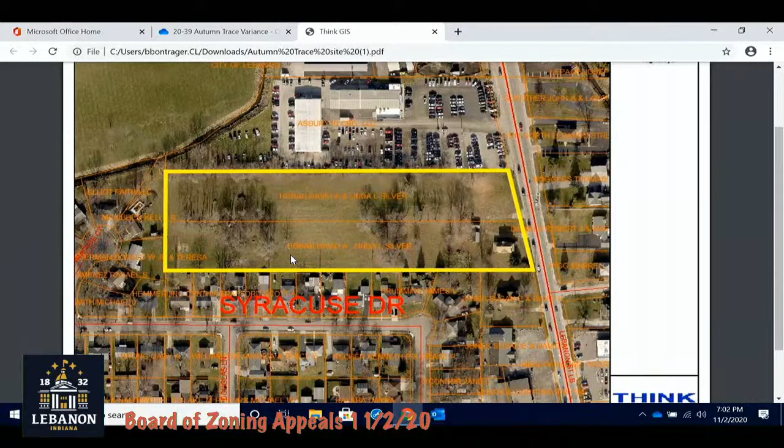I'll walk through a little bit of the project overview for you and then the two specific requests that are for you here tonight. Just generally speaking, if they'll pull the screen up here, we'll look at the overall site. Outlined in yellow is the site. As you can see, it's kind of a very deep but relatively narrow site, which is the reason for a couple of the variance requests tonight. You see there are residential homes that border this property to the south and to the west, and then you've got the car dealership to the north.

For reference, if you're familiar, this is the site where the car wash was proposed out here on Lebanon Street, so it's just north of that, between that and the car dealership on North Lebanon Street. So that's the overall site. As is mentioned, this is zoned planned business commercial. Senior living, which is being proposed here, is a permitted use within the planned business commercial zoning district. So the use is permitted.

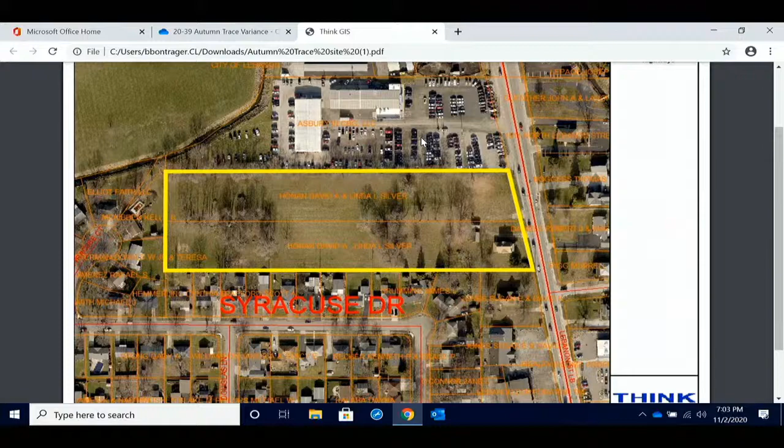Looking at the overall development site with the applicant, before I get into detail there, I'll pull up the overall site. Actually, let me zoom out a little bit so you can see it a little bit better. This gives you an idea a little bit of the overall site. Lebanon Street again is on the right here. They're providing a single entry point, parking in the front and the back of the building. It is a U-shaped building that kind of sits like this.

You've got access around both sides of the building. These are actually one-way access. The fire department requires 360-degree access, particularly on a two-story building like this, so they were required to put drive aisles on both sides of the building. So this kind of gives you a general idea of the layout of the property here.

The two variance requests are related to, again, I mentioned they're very deep but relatively narrow properties. So what you have here is you have the building, the required building-based landscaping, the required sidewalks, the required drive aisles. What you're left with on the north and south sides of the property is a somewhat limited area. On the south, you have utilities that run through there, as well as drainage swales, providing drainage to the back of the site where there's a dry detention pond. Same on the north side, you also have an open swale up here that's conveying stormwater to the back of the property. So you have a very limited area to do anything.

And there's two things that created a variance request because of this. The first is parking lot perimeter landscaping. As you can see, they've provided all the required buffer and parking lot perimeter landscaping out on the front of the building adjacent to Lebanon Street, as well as across the back of the property. And I will point out here, they are doing some revisions to the site plan on the west side of this property to the rear, because the properties are so deep, they are directly adjacent to residential zoning, which requires a buffer yard.

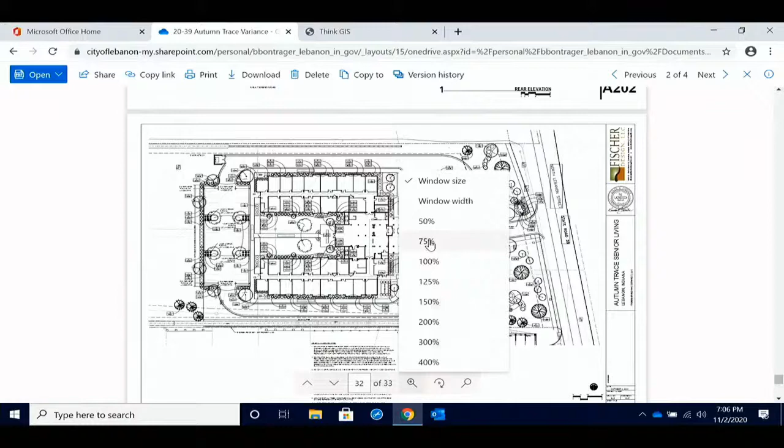they are providing along that south property line an 8-foot privacy fence that'll be set a foot off the property line that will run the entire length of the improved area. So essentially from the back of the parking lot here, it extends all the way up to the front of the improved area in this area.

So because they don't have the space, they worked with staff and decided it made more sense just to provide the privacy fence here, 8 feet tall, to provide as much screening as possible where they weren't able to provide the full depth, the 30 feet. So at least there's the visual screen.

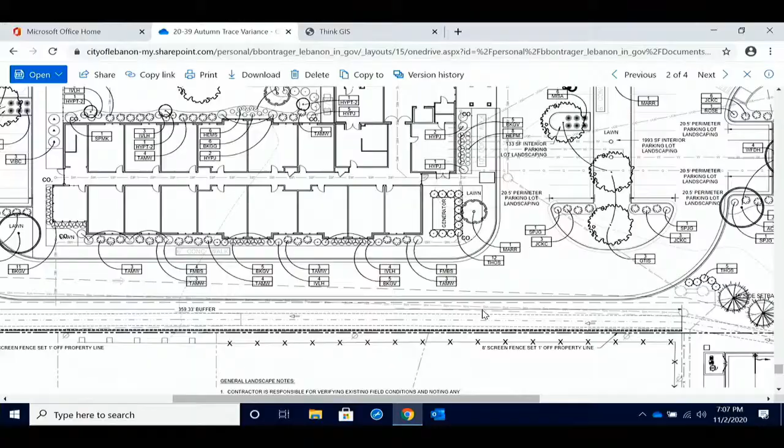Just walking through a little bit from the staff report on the first variance for parking lot perimeter landscaping, I'll just reference the findings of fact in the staff report, that the relief from the perimeter landscaping requirement poses no imminent threat to the public's health, safety, morals, or general welfare of the community. And the request for relief from the perimeter landscape will not affect the use and value of the area adjacent property in an adverse manner.

And then the third one is the strict application of the UDO will result in practical difficulties. We have determined that there are practical difficulties because the need to provide 360-degree access, and underground utilities and drainage, are limiting the space for the landscaping, thus supporting the idea of the variance. So with that, planning staff has recommended approval of the development standards variance request to permit relief from the perimeter landscaping requirement. And then number 2, the landscape buffer here on the south side.

The relief from the buffer requirement poses no imminent threat to the public health, safety, morals, or general welfare of the community. And the use and value of the area adjacent would not be affected in an adverse manner. They are providing the 8-foot tall privacy fence to provide the visual screen that's required of the buffer. And third, the strict application of the terms of the UDO will result in practical difficulties. Again, for the same reasons as the last one, the need to provide 360-degree access and the underground utilities and exposed drainage swales certainly provide limited area for this to occur.

So with that, on the second variance for the buffer, planning staff does recommend approval of this development standards variance request to permit relief from the landscape buffer requirement. I'd be happy to answer any questions if there are any.

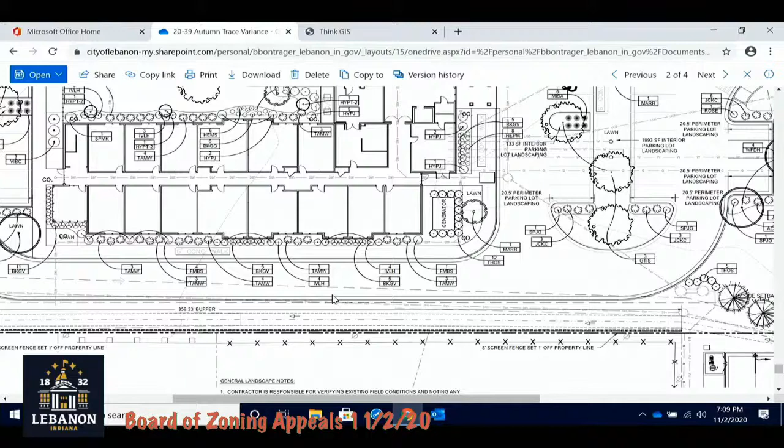Ben, I have a question. How far is the building from the property line on the south side? Let me see, I might have to go back to the site plan to see if I can provide dimensions. I can tell you that the drive aisle is 20 feet here. So we're somewhere around 40 feet, I would guess. Gary, do you have that? Yeah, let me see if I can locate.

While we're looking, any elevation change from the building to the property line? It's pretty flat. I don't know that there's much. It is a 2-story building, so it is still visible. An 8-foot fence isn't going to totally screen a 2-story building. But yeah, the site is relatively flat, so if there's a change in elevation, it'd be minimal. Looks probably roughly 40 feet. Yeah, I would guess it's in the neighborhood of 40, 45 feet. Just looking at the scale here, that's 20 feet. That's about 15, probably another between 5 and 10, so.

Okay, any other questions? What will the material be for the fence? It's like a tan vinyl fence. Are there any setback requirements from the property line to the driveway? I'm sorry, say that again? Any spacing requirements from the property line to the driveway? To the driveway. This southern driveway? Yeah. So because there's a buffer requirement, it would have to be 30 feet. But normally a drive without the buffer requirement only has to have a 5-foot setback. Okay.

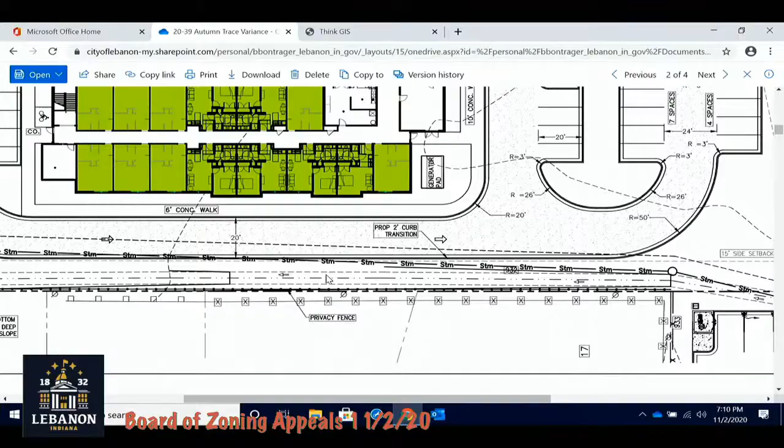Anything else for Ben? Thank you, sir. Would the applicant care to step forward?

Yes. So I'm Jason Yoder, TriMac Building Services. I'm actually the general contractor of the project. And Jim Gillen is the owner of Autumn Trace, so I figured I'd bring him with me. Okay, you might just give us a brief summary of what you're doing and so forth.

So the project itself is a two-story assisted living building, 50 or 54? 54 units. As far as the construction part, an elevator, nice finishes on the inside, granite countertops in every unit. Living spaces or private dining rooms, theaters, things like that inside the building.

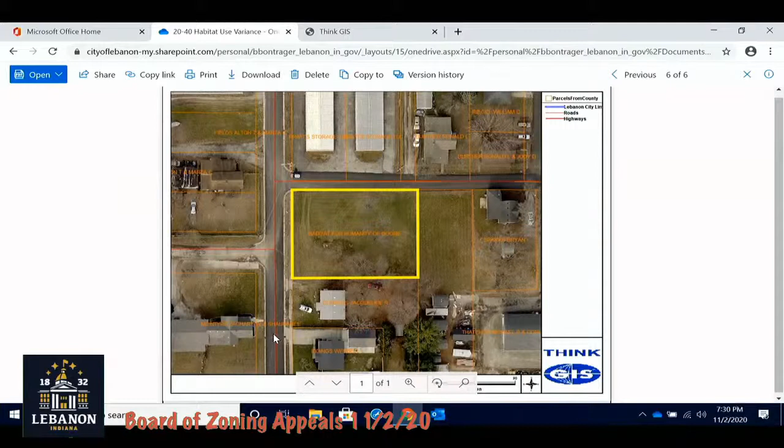Ben? All right, this is going to seem like a very familiar request for Habitat for Humanity, because it seems like every property that's gifted to them or they purchase is zoned incorrectly for residential uses, even though it's in a residential area. And that's essentially what we've got here. This is actually a property that they purchased from the city through a bid process. It is southwest of downtown along Coombs Street.

This is kind of a mixed-use area. There's some older industrial in this area, but then also a lot of residential. As you can see here in the aerial, you've got storage units to the north. You've got residential units primarily around it. This is primarily a residential area, but as you go further west, it does get into more commercial or industrial uses. But as you can see here, this site is not sized appropriately for general industrial uses.

It doesn't meet any of the lot size requirements. You couldn't meet any of the setbacks. It's a residential lot. It just happens to be zoned industrial. So again, like I said, this is probably the fifth request they've had in the last 3 years for something like this. It's always zoned multifamily or commercial or something like that. So the request is here to allow single-family residential uses within the general industrial zoning district. It's a use variance request.

The 5 findings of fact for use variance are indicated in the staff report. Again, as I mentioned, in terms of criteria, the need for the variance arises from some condition peculiar to the property. It's zoned for industrial uses, but it's not sized appropriately. It's sized for residential uses. That's what's in the general vicinity. The strict application of the terms of the zoning ordinance will constitute an unnecessary hardship. Again, this property wouldn't be buildable if it was required to meet the general industrial zoning classification and development standards.

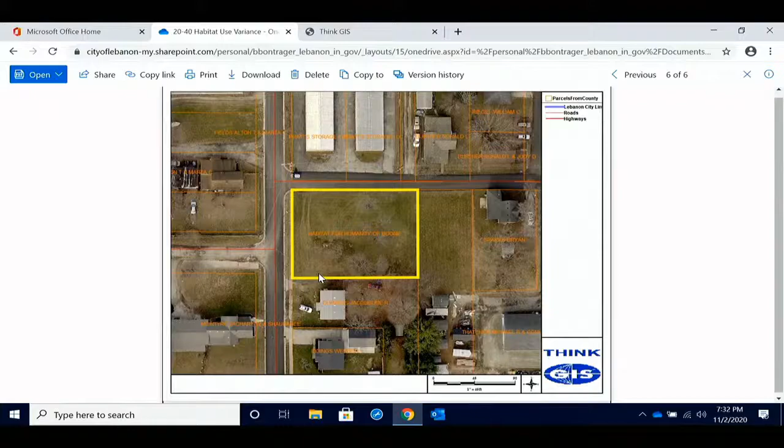And the approval does not interfere substantially with the City of Lebanon comprehensive plan. Our plan, which was just updated a year ago, designates this property for mixed-density residential uses. So the applicant is proposing a use that is consistent with the comprehensive plan designation. And with that, the City of Lebanon planning staff recommends approval of the variance of use request to permit single-family residential uses within the general industrial zoning classification. Happy to answer any questions. No questions? Thank you, sir.

Would somebody from Habitat care to step forward? Hi there, thank you for hearing us. Another variance request, appreciate it. Okay. Is there anything you want to tell us about it? No, we're excited to get this property. We've been waiting for this one and another one on Meridian, which we'll have to apply for a variance for as well. Just excited to be able to keep building in Lebanon.

We did complete 2 homes this year. We're super proud of that. It's been a tough year, as everybody knows, and we were still able to build 2 homes for 2 single moms with kids that now have a place to call home. So we're real happy about that. So this lot, we're going to split it into 2, and we'll be able to put 2 nice houses on it. Okay. Any questions?

Thank you. Okay. Once again, it's a public meeting. Is there anybody in the audience that would like to come forward and speak? Okay, we will close the public end of the meeting, and I think it's pretty straightforward. Look for motions. I'll make a motion. Go ahead. I'll make a motion to approve docket number 20-40. Second. Have a motion, have a second. Kelly. Mark Vandeman. Aye. Bruce Polly. Aye. Ron Edwards. Aye. Chad Kiger. Aye. Lori Gross. Aye. Motion carries. Congratulations.